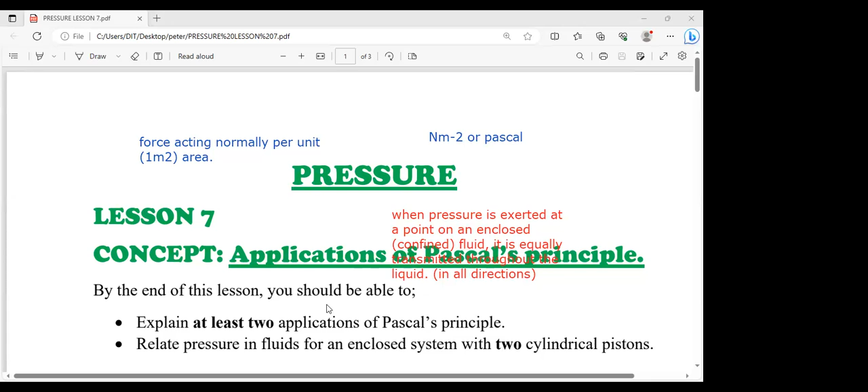So we are going to, by the end of this lesson, be able to explain the applications of the principle, and then we see how we can relate it to calculations that we will see later.

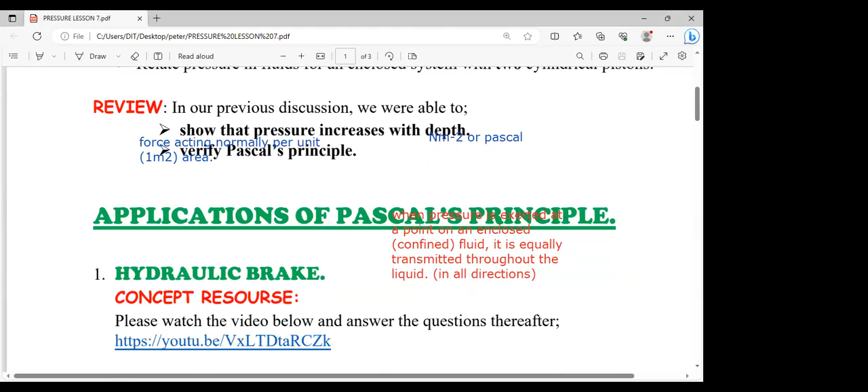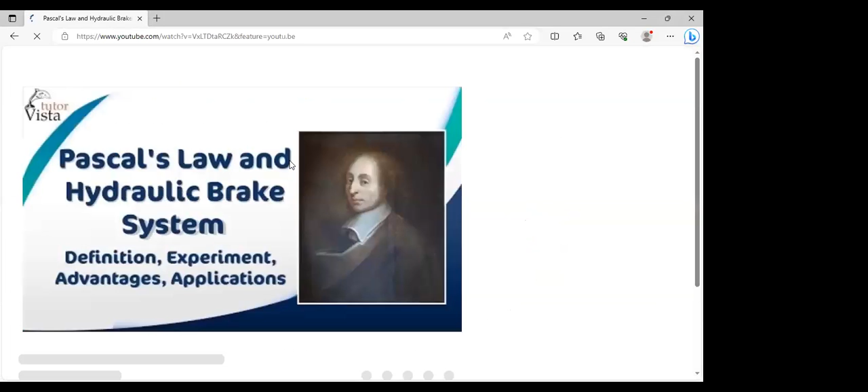Now, the first application is the hydraulic brake. So I want you to pay attention, and we see this video here, and we see how a brake applies. So we are going to see this video, and after we have seen it, I will ask some questions. I want you to pay attention.

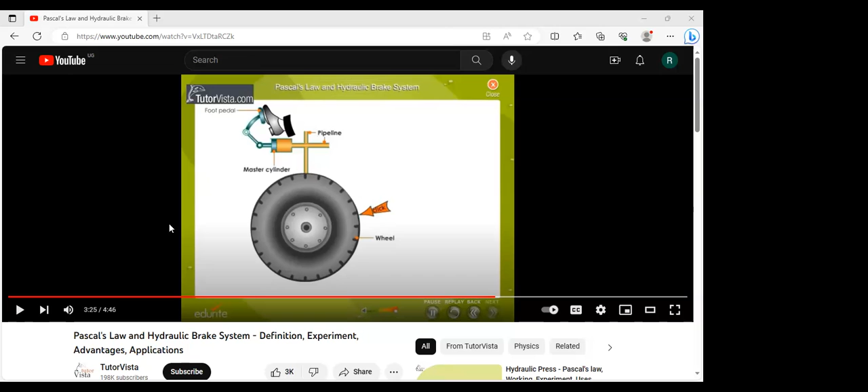So by the time the video was playing, your mic was muted, so we were all not getting anything. Can you get something now? Yes, I can hear you speak. No, I want you to hear the video itself.

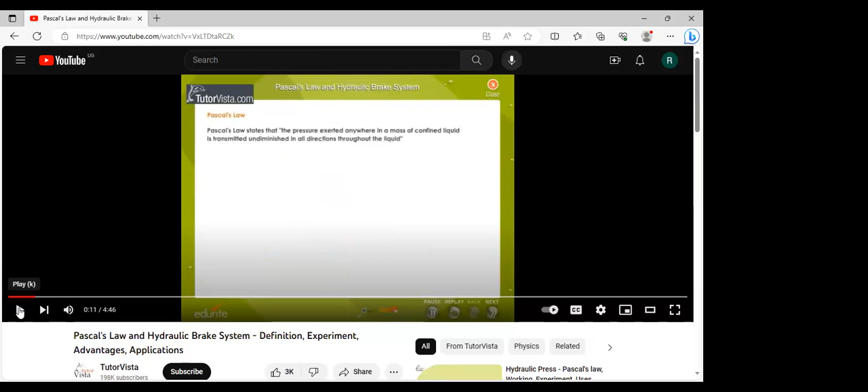So you play. So I'm not hearing. Okay, I think I'll have something else to check later. Yes. Maybe. Okay.

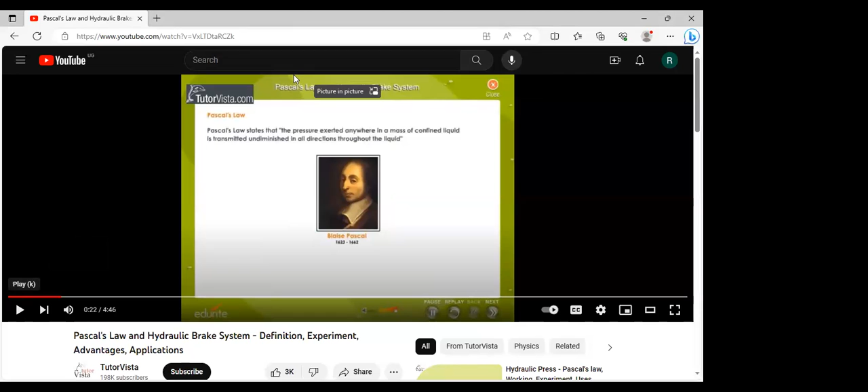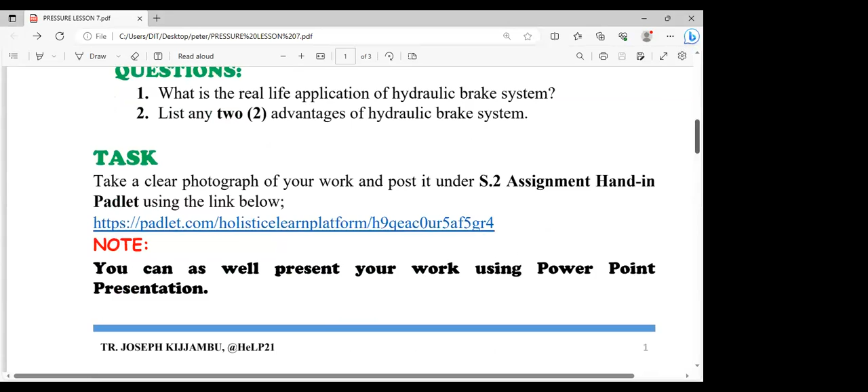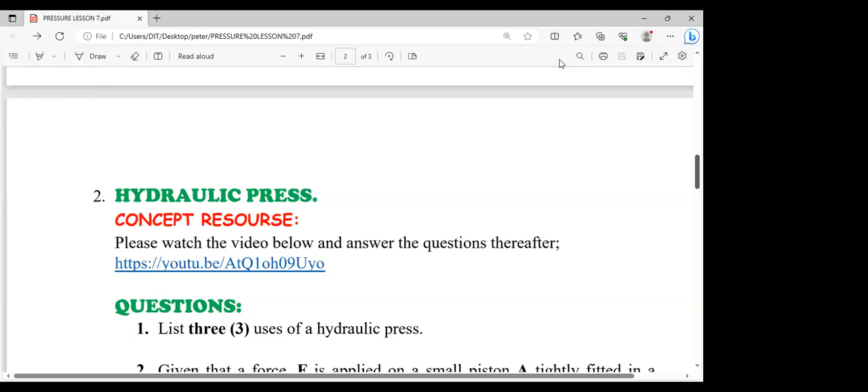Otherwise, I think we should go back to let us just have a diagram drawn. We see how this thing happens. Now, the hydraulic system, either a press or...

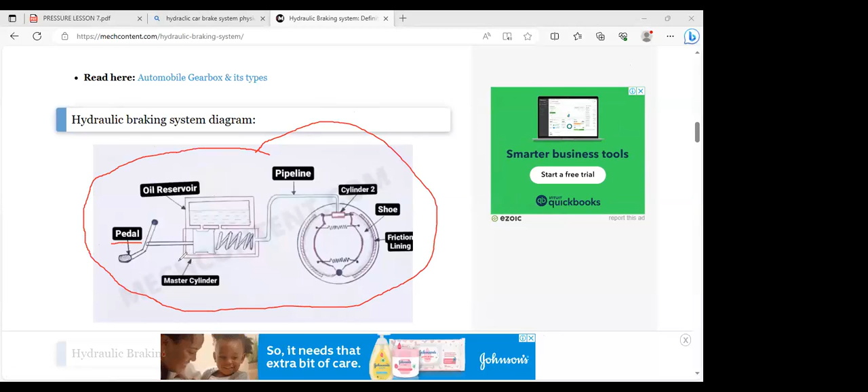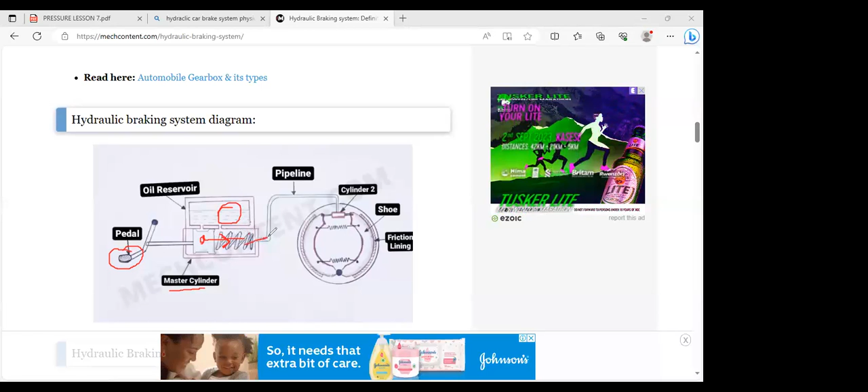The pedal is connected to what is called a master cylinder, and above the master cylinder is an oil reservoir. A pipe connects it to another cylinder, which connects to the brake shoes. When you press the pedal, it pushes a piston inside, exerting pressure in the master cylinder. Because there is fluid, oil, inside, pressing this piston pushes the oil through the pipeline, and that oil moves with the same pressure exerted on the pedal.

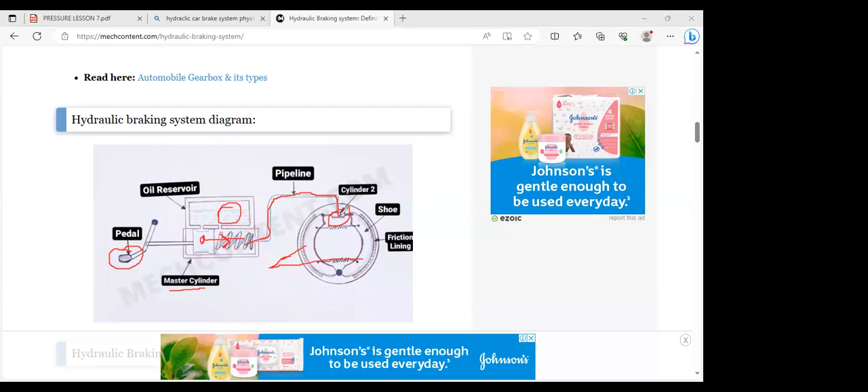That oil moves up to cylinder 2, which also has pistons connected to the brake shoes. When you push the pedal, the pressure is transmitted through the oil until it reaches this point, where part of the oil pushes one shoe, while the other piston pushes the other shoe. So at the end, when you press the pedal, the brakes are applied and the car stops or reduces speed because of the pressure exerted at the pedal, equally transmitted from the master cylinder to cylinder 2, which is attached to the brakes.

So that is briefly how Pascal's principle works in such a reservoir, a car brake system.

Yes, Ivy, you have a hand up. Ivy. Okay sir, thank you. Yes.

Thank you sir, I've not understood very well. Are you trying to mean that in this hydraulic braking system, the pedal first, is it the pedal to go fast, and then the brake? Okay, I've not understood. Of course, the car cannot brake before you press the pedal, because in the car there is a pedal for brakes. So it is you to first apply the pressure on the pedal, and then all the other processes will follow.

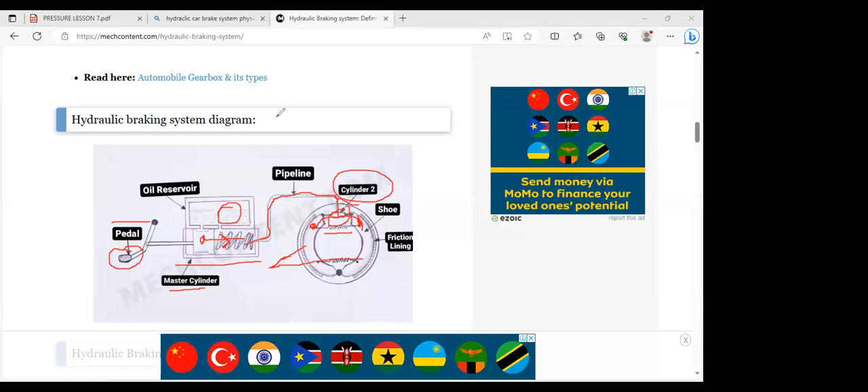Davin. Okay sir, I was just inquiring because kind of you are breaking, okay, like maybe your network, and also that when you're explaining about the braking system, and when they ask like for the applications, can we say it's used in cars?

After, like when they ask you, say it is used in cars, then you explain about the braking system. Okay, so you want, I have not got your question well. Apart from the braking, you want applications for what? The principle.

Yeah, if they say application of the principle, you don't say in cars. The principle is not applied in cars. The principle is applied in the hydraulic braking system of cars. So that is how we state it. We don't say it is applied in cars. We say it is applied in the hydraulic braking system of cars, then in hydraulic lifts or press lift. So we don't say in cars, yes. Thank you. Okay.

Okay, I'm repeating briefly on the explanation of how this car braking system works, and I want you to pay attention such that we can go to something else soon. I have told you that, first of all, it is pressure that has to be applied at the pedal. A pedal is that brake that you see, what you call a brake in the car.

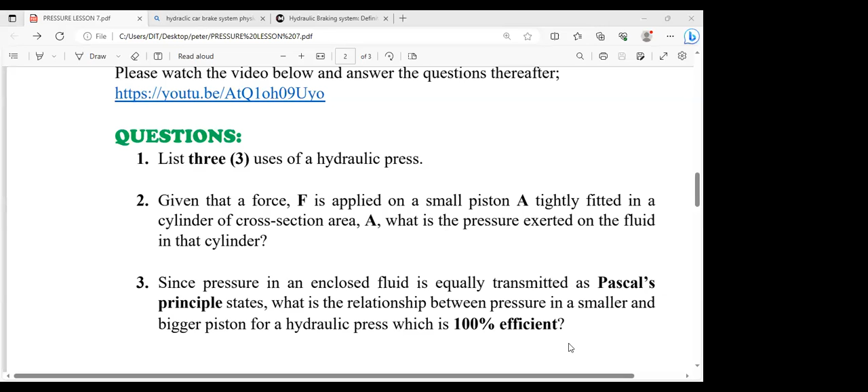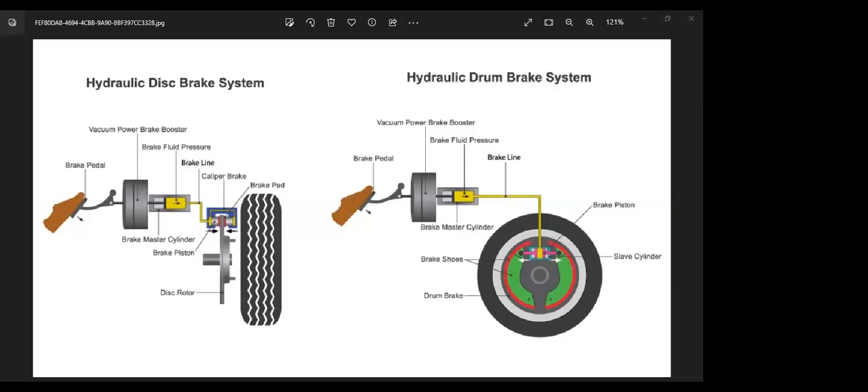All right, let us now switch to the hydraulic press or hydraulic lift. For this, I beg you, pay attention, because it's also used for calculation, but the idea that we use is the same thing. So what we are going to do is have this diagram here.

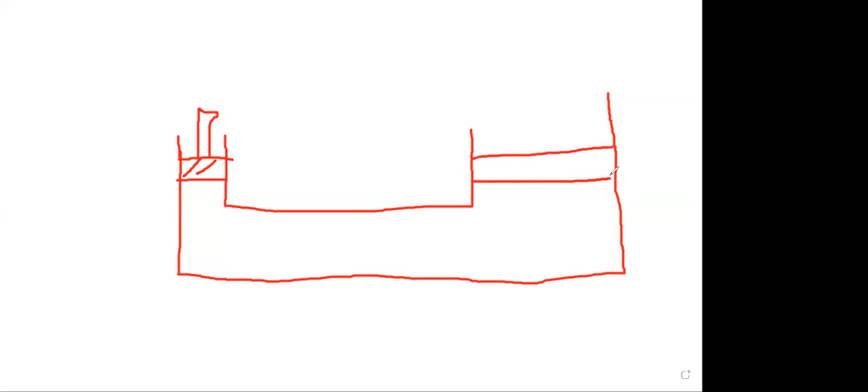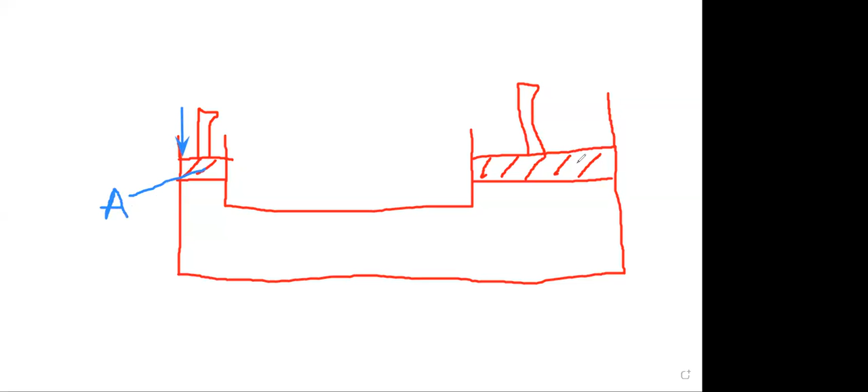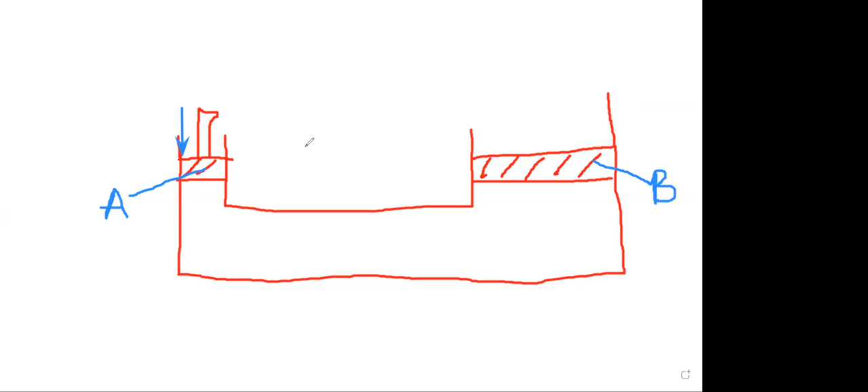So we have a diagram here. This diagram is an illustration for a hydraulic press or hydraulic lift. What happens is that we will be having pressure applied at this piston here. I'm going to call that piston 1, this one here, so let me call it A, piston A. And then there is another piston this side, which I'm going to call piston B, this one here. And what is in here is a fluid, because the principle works for fluids only, either a liquid or gas.

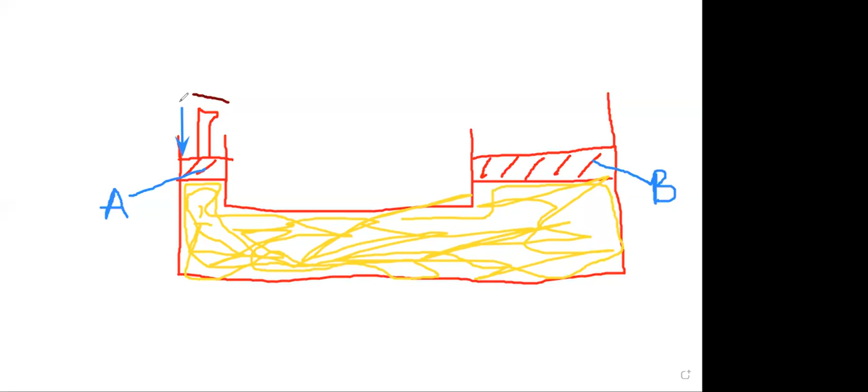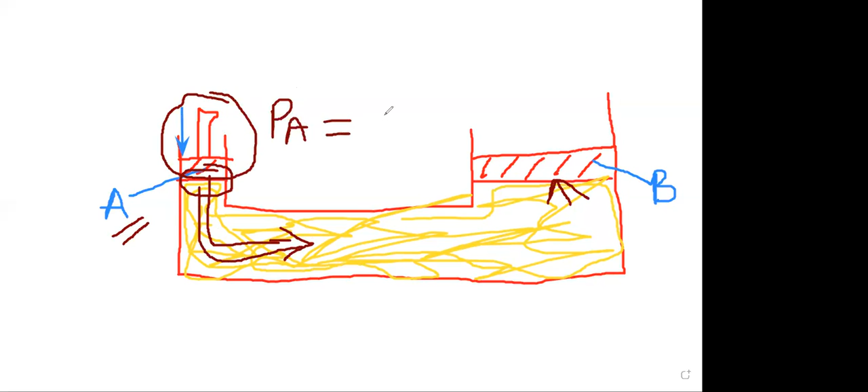The principle says that when pressure is applied at this point, at piston A, the pressure is transmitted. Transmitted means the same pressure that is at this point is moved from that point throughout the liquid until it reaches piston B. That means the pressure that you have at A will be the same pressure that you'll be having at piston B. That is what the principle states.

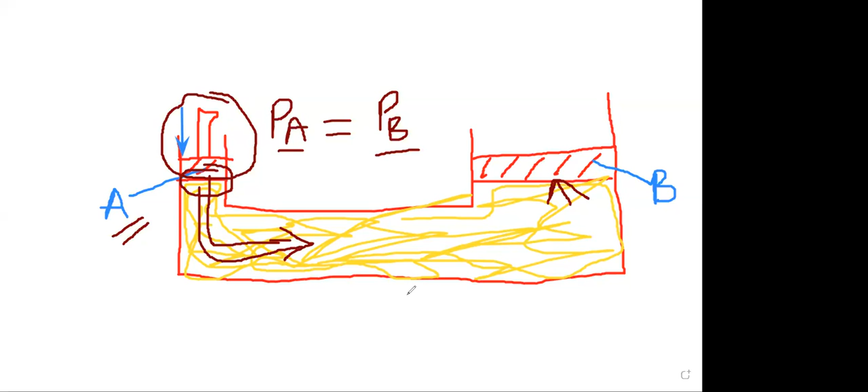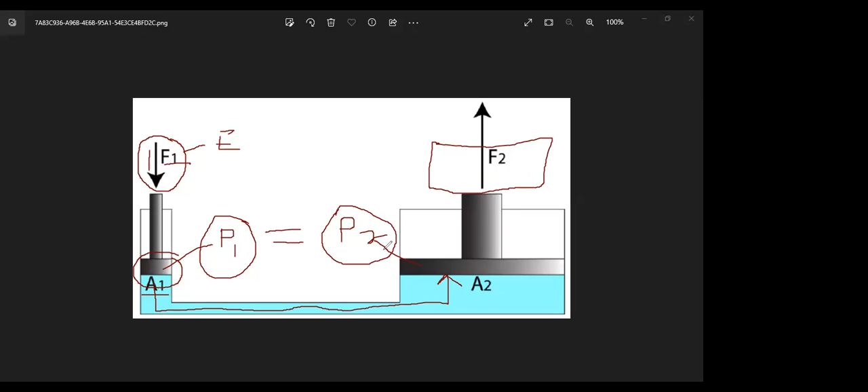Yes, I was saying that pressure at piston 1 will be the same as pressure at piston 2. Now, I want you to pay attention to the next thing I'm going to do with this diagram, because it's going to lead us to the calculations that we have in our document there.

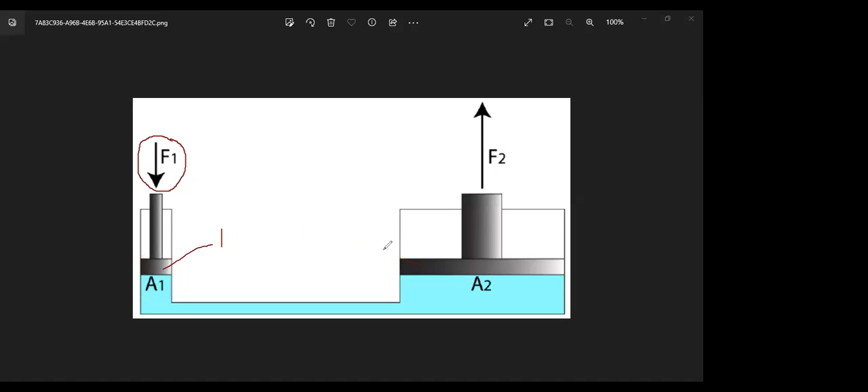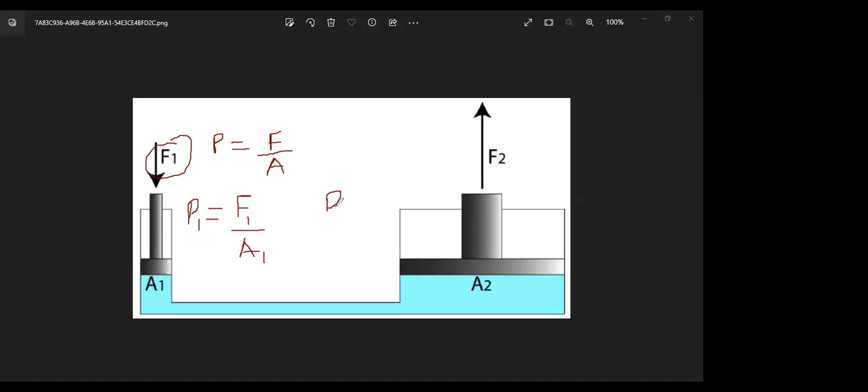Now, each of us knows that pressure is got from force F out of area A. That is how we define pressure: pressure is force divided by area. That means if I'm to get the pressure at the smaller piston, my pressure P1 is going to be equal to the force F1 applied here, divided by the area A1 of the piston. And my pressure P2, at the other, larger piston, is going to be equal to the force F2 at that point, divided by area A2.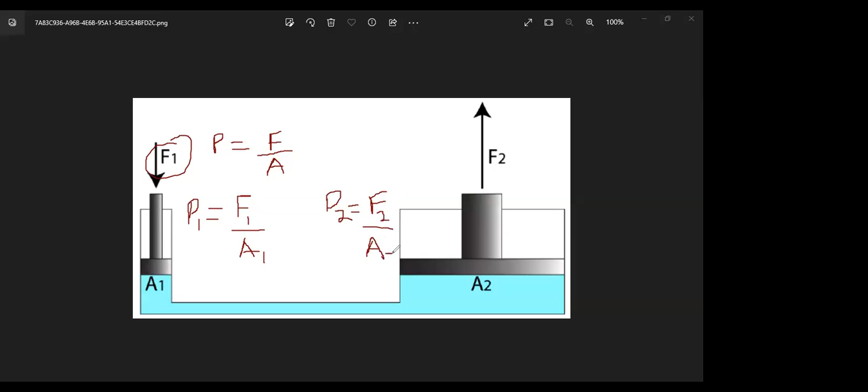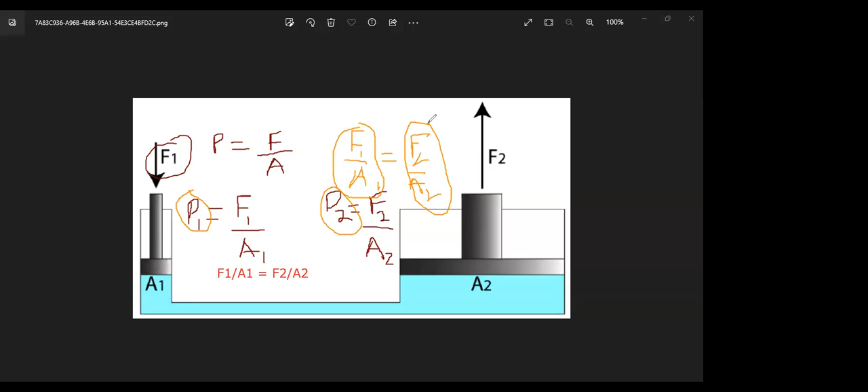So what does it mean? It means that since pressure at this point is equal to the pressure at this point, that means my F1 divided by area A1 is the same thing as my F2 divided by area A2. That is what it means. So it means that F1 out of A1 is the same as F2 out of A2. And why is it so? It is because pressure at one piston is the same as pressure at the other piston, since it is transmitted equally throughout the liquid, and it's the same in all directions.

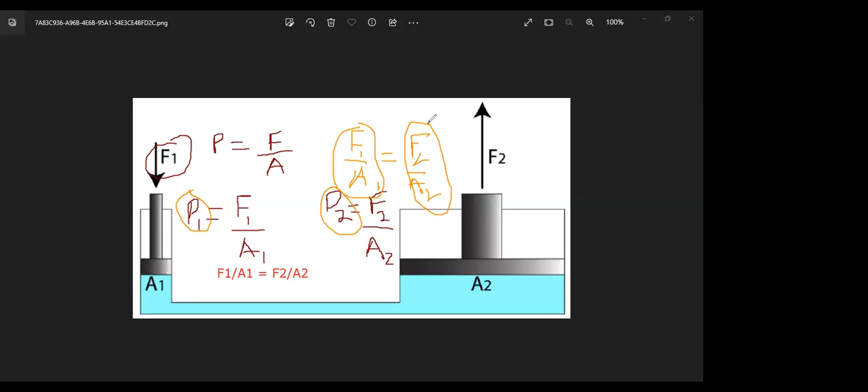So we are going to look at this document that we have here. We have these questions here, and these questions are of the hydraulic press. We have a hydraulic press, and they are telling us that the figure below is showing a hydraulic press, and they want us to do the following.

They have told us that if the cross-section area of piston B is 80 centimeters squared, and that of piston A is 2.5 centimeters squared, they want us to find the force at B if a mass of 60 kilograms is applied to piston A. And they have given us acceleration due to gravity as 10.

So I want you to note the things that they have given us. We have piston A and piston B. So for piston A, yes? Yes, sir. Teacher, yes.

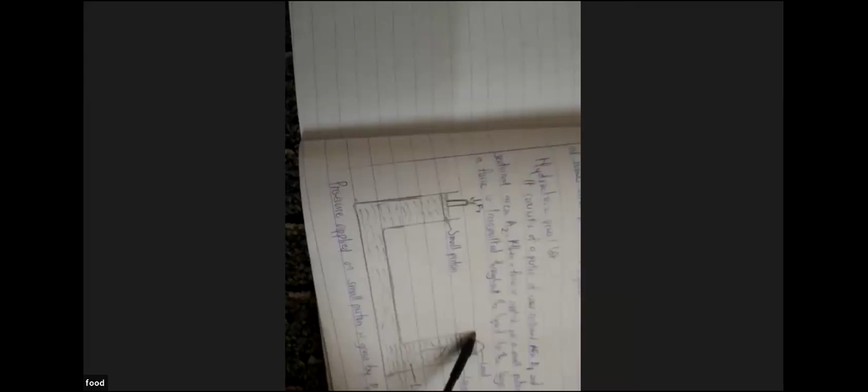And then here is the pressure. That's why it's just called it, I don't recall well, but piston one. Let me call it piston one, and then I'll call the large piston piston two. And then here, if you take a close look, here's a fluid. So when you apply pressure in piston one, the small piston will exert some pressure that will lead this fluid to raise high the load of the vehicle. For instance, once used in the garage, it will have to raise the vehicle. Hope you're understanding. And then the small piston application will be pushed to apply the pressure to this fluid, whereby this pressure will come all the way around and then push the large piston, and then the load will be raised up. Hope you're understanding. Thank you.

Okay, has Food explained to us well? Yes. Yes.

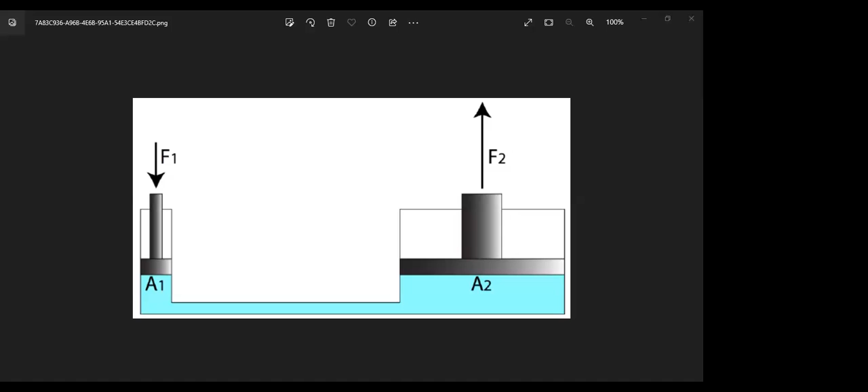Okay, so if you have at least understood what you are saying, then I want us to try out these questions before we leave. There is a question there, question 1. I want you to read through it and we see how we can do it.

Okay, if you read through this question, yes, your hand is up. What do you have to say?

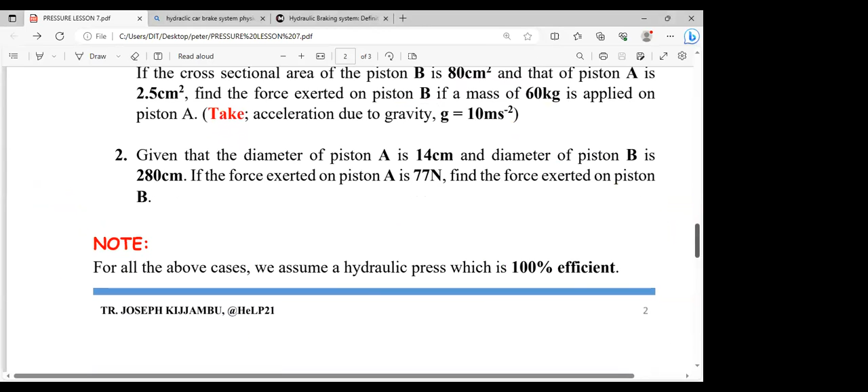There is question 2 on screen. Can I have you people try it out? When they say diameter, even if you don't calculate the area and use the diameter straight, you will be getting the same thing. But if you want, you can get the area of the piston from pi r squared, since when they talk about diameter, we know they're talking about a circle. These pistons are circular, so you can get the areas of piston A and piston B using their diameters, then look for the force at piston B like we've done. Try out number 2 and let's see which answer you get.

Yes, Ivy? Okay sir, according to this case, what will the area be in, centimeters or meters? Because whichever is easy to change, it's okay to put it in meters, but whatever case it is, I'm sure you'll be getting the same answer for force. Okay.

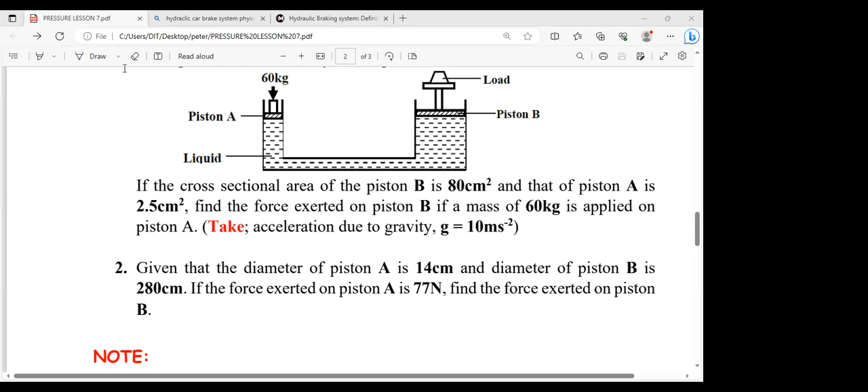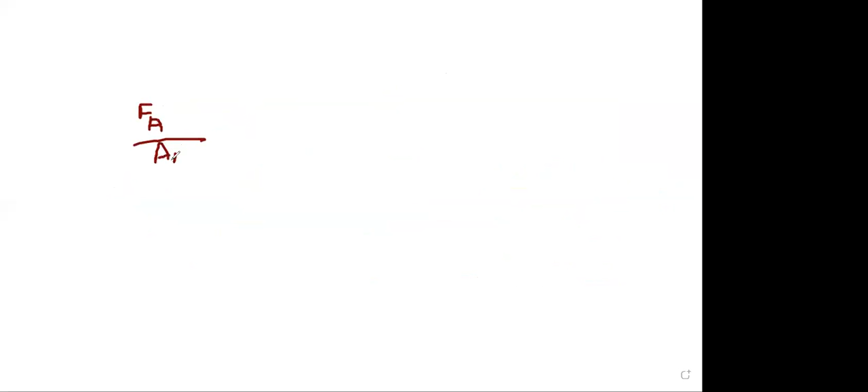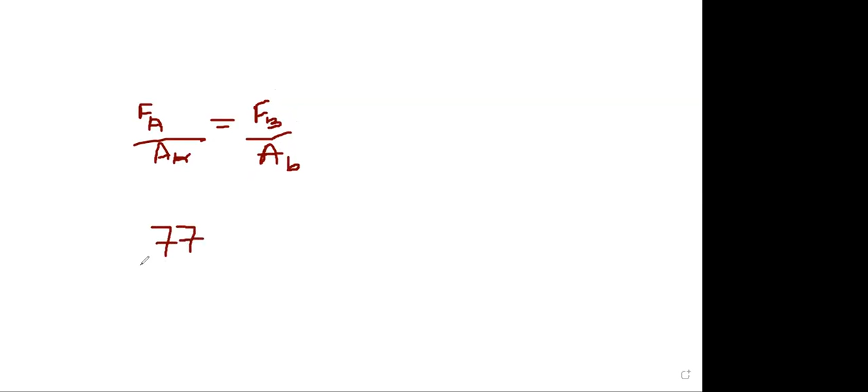Now we have, we said that force A over area A is equal to force B over area B. But I've told you that it's okay even if we use the diameters, we'll be getting the same answer, I assume it's the same thing. So FA, they have given us 77. Area A, they have given us a diameter of 14. Another person can first get the area using pi r squared: if diameter is 14, radius will be 7, and 7 squared will be 49 times pi, so that's if you use area. But I'm going to use diameters straight and see what I get.

So this is force B. After getting force B, the diameter they gave us was 280. So now if you do this, you realize that FB is equal to 280 times 77 over 14. If we calculate well, we are getting our answer as 1540, and these will be in newtons. So our answer is 1,540 newtons, that is what we are getting.

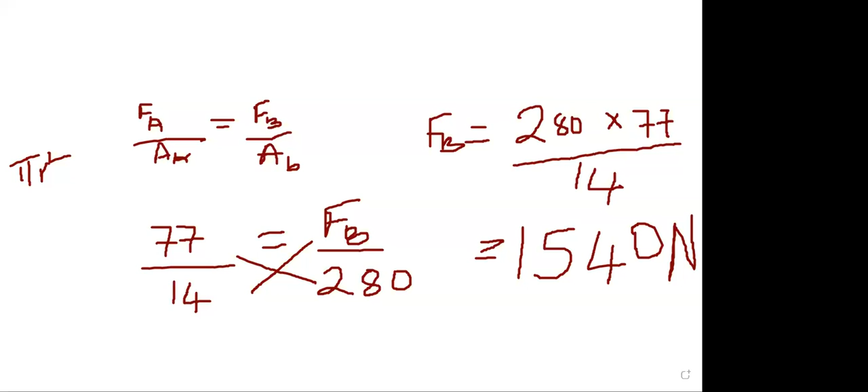So that is how we can calculate using Pascal's principle. And I think we have come to the end of our lesson for today because we have to go for ICT training. Yes, soon, so please allow me to stop here, and I wish you a nice ICT lesson.

Yes, Ivy? I just wanted to inquire why you didn't find the area. It's okay, some people can get the area, some people can use it directly as it is, because even if I use the area, the following things will not change: the pi will not change, it will be the same so it cancels out. Even when I divide diameters by 2, that 2 will be the same on both sides, so it will not change the answer.